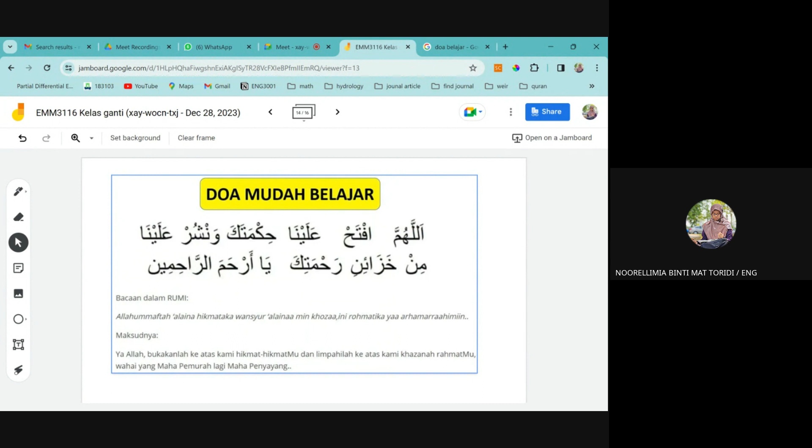So last week, okay, this is the assignment I gave last week. Okay, so we should draw a table.

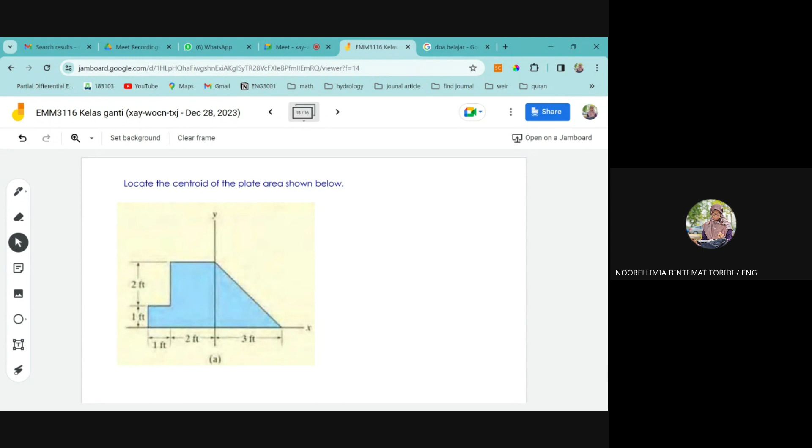Segment, okay, or part, and then centroid, y centroid, x centroid, multiply with area, and then y centroid multiply with area.

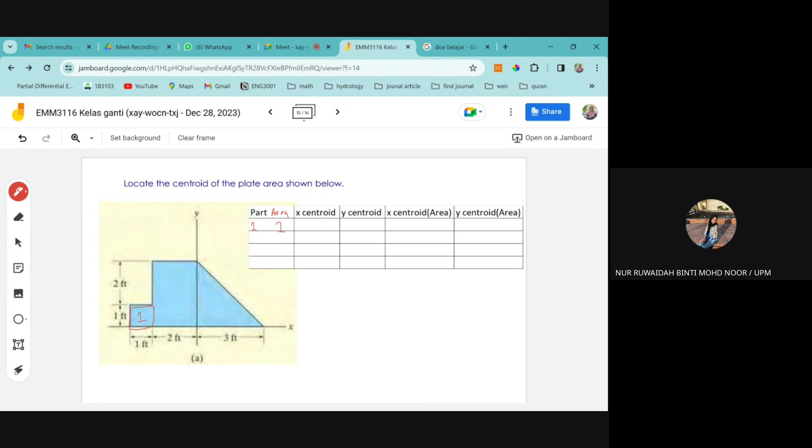1, okay, and then x centroid 0.5. 0.5, and then y centroid 0.5. 0.5, okay, let me explain here. So the base, you took the base here right? Is this the base? Correct. Okay, so the base is here at the centroid. The centroid? Y centroid, sorry. Y centroid.

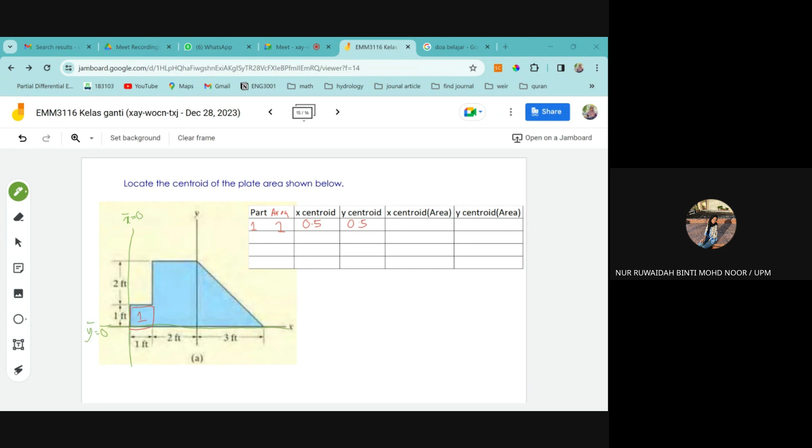Y centroid equals 0. Okay, if it's x centroid, where do you take the base? Here, is it? So this is x centroid equals 0. Okay, x centroid 0.5. Okay, x centroid multiply by area, 0.5. 0.5, wait that's fine, okay, 0.5. Okay, 0.5. Also y centroid multiply by area, 0.5. 0.5 also. Okay, so done for part 1.

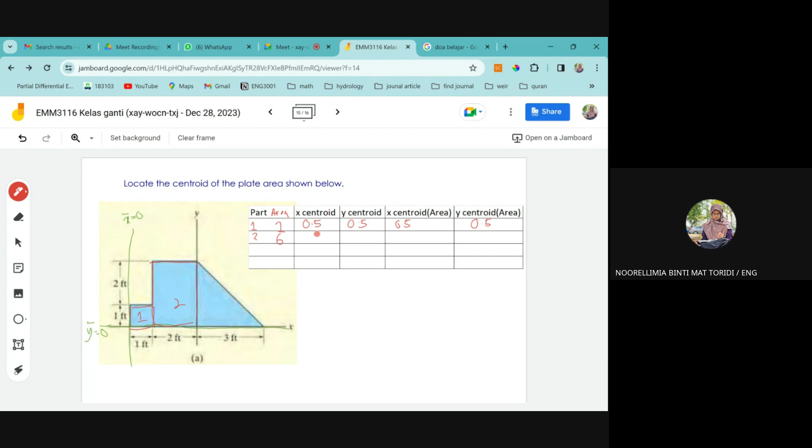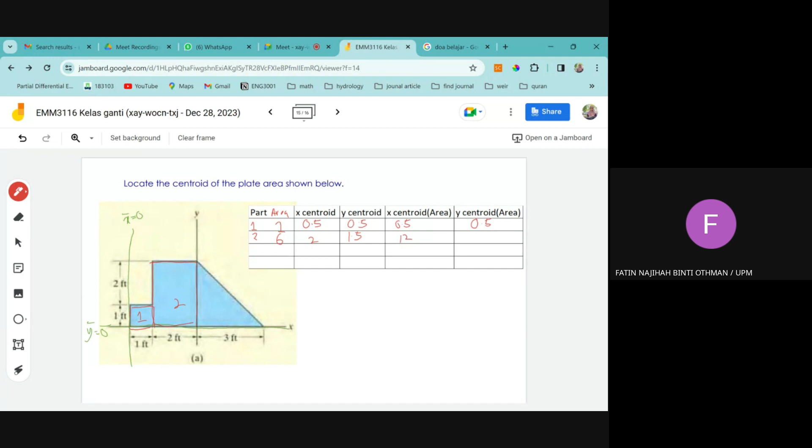Okay, so what's the area? The area is 6. Okay, x centroid? 2. 2, okay, next, y centroid is 1.5. 1.5. And then x centroid times area, 12. Y centroid times area, 9. 9, okay, Fatin Najihah.

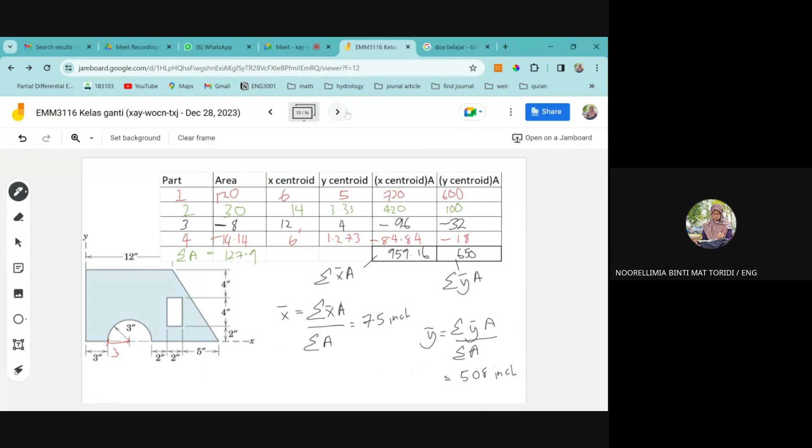Okay, who wants to volunteer for this one? I will doctor, just total it up right doctor? Wait, total and find out using the previous formula which is x centroid. Okay wait, where... okay, so this is the formula which is summation of this one. Okay, summation, okay, what's the summation of area?

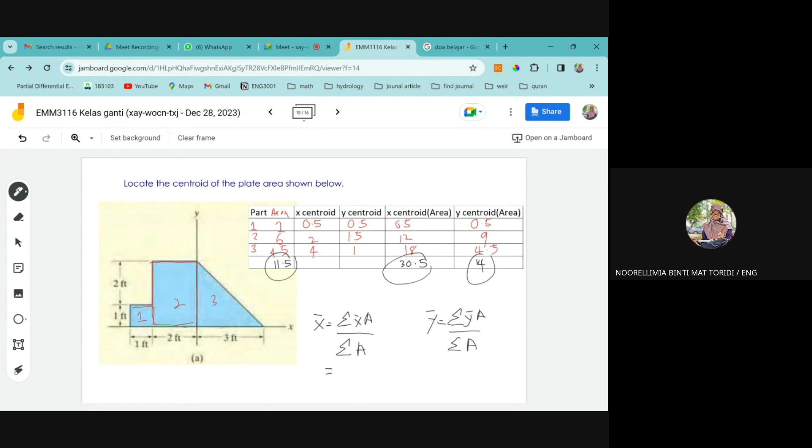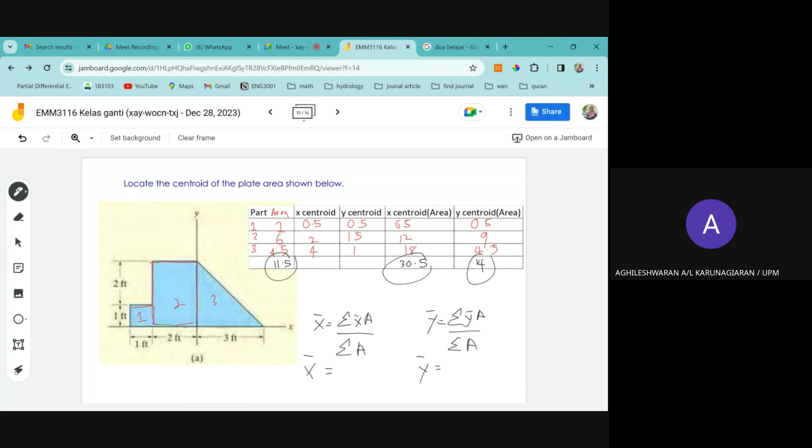Okay kalau based on this one and this one, berapa kita dapat ni Agi? X centroid dia berapa? Tadi Agi kan yang nak volunteer. Ya doktor, X centroid dia 2.65. 2.65. Okay and then Y centroid? Y centroid dia 1.22, 1.22. Okay sekejap, bagi mark dulu dekat Agi.

Yang the rest tak nak volunteer ke? 1,2,3,4,5. 1,2,3,4,5,6. Sebab lepas ni we go for friction tau. So friction ni macam dia more to equilibrium and then we have additional elements which is friction.

Okay so based on this one 2.65 kan, and then this one 1.22. So we have all positive here. Tapi kalau based on this axis, tak boleh kita nak buat. Kalau kita nak buat, then we have to base on, boleh juga, okay based on this axis. Okay contoh macam ni kan, so this is our axis yang kita buat kan.

Okay so it will be X bar, berapa? 2.65. So 2.65 is sini 1, 2. So around here, 2.65, kita ambil sini lah. Let's say macam ni, so this is X bar, 2.65. Okay and then Y bar is 1.22. Okay so let's say dekat sini, 1.22. So this is 1.22, this is 2.65. Okay so maksudnya this is the center of this composite area. Okay which is 2.65 for X and Y is 1.22.

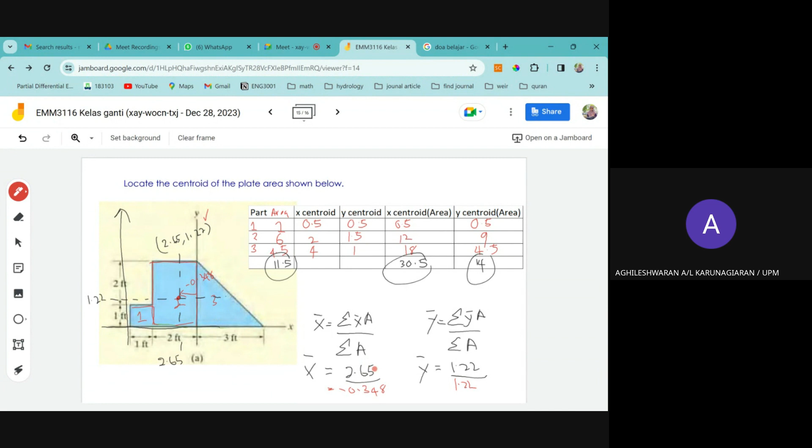Doktor saya tak faham yang 2.65 tu dapat dari mana, yang awak kira ni dapat dari mana? Bukan yang dari jawapan yang kira dari aksis tengah, tak, yang ni yang kita buat ni, kita buat axis sendiri tau. Okay so macam kita buat tadi, before yang awak kira semua tu, this is your, what is it? So this is X centroid equal to 0. Faham ke? Memang dia Y axis, tapi inilah based on kita punya, macam mana saya cakap X axis ni, okay, from here equal to 0, and then moving towards here will be positive. Okay? Faham ke? Faham, doktor. Yang lain faham ke?

Okay, let's say if it's difficult, use the Y and X axis that is already given in the figure. So Y centroid means like this, X centroid we base on this one. This is the base for X centroid equal to 0.

If you say this one, the middle point for part 1 area is this one. So here, negative 0.5, distance here is 2.0. Then from here to here it will be negative, so here negative 2.5.

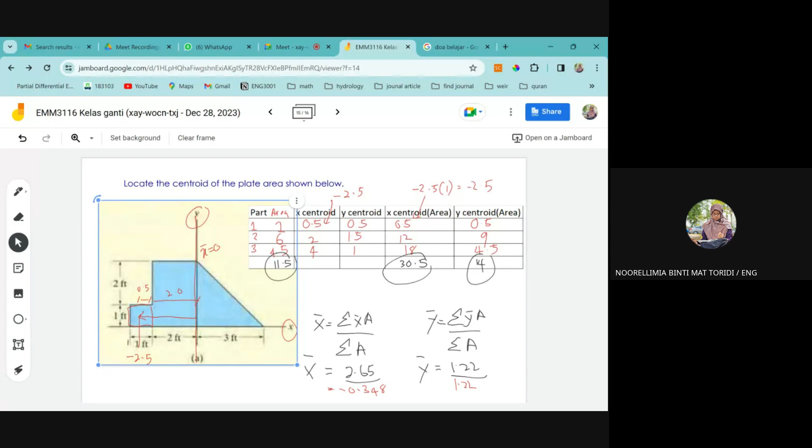Okay let's see. Based on what we calculated just now, the center is here. 1.22, and then the X is negative 0.348, something like that. So here, negative 0.348.

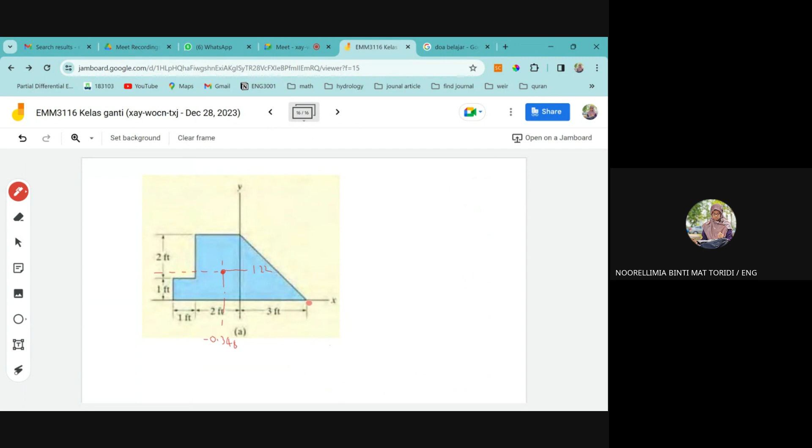This is the center. And then let's say we have tension here, and let's say here we call it, this one A, this one B. Let's say A here we have AY, and then for B let's say we have BX. And then this one will be what? What is the force there? Should be weight, right?

So that is the function why we want to find the composite area, the center. The center of the composite area. So this is the function of it. Understand?

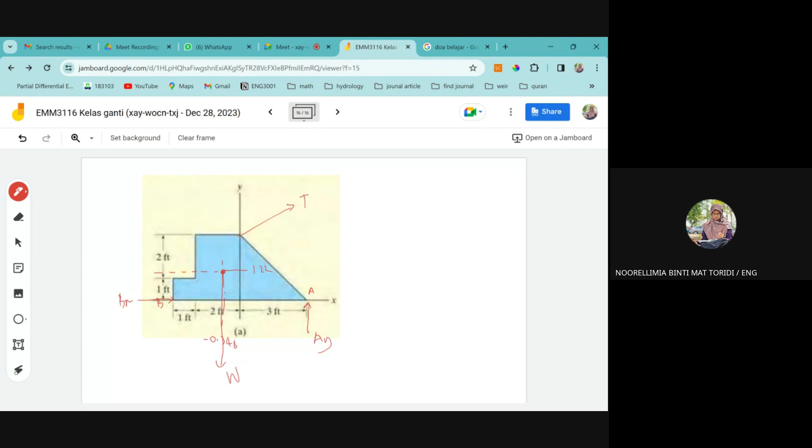Lecture notes, Friction. Where do I want to share this... Okay. Can you see my slides? Can you see? Okay, so we go into a new topic, which is friction.

Okay friction. So for introduction, ideal assumption: forces between contacting surfaces act normal to the surface. So friction is a force between contacting surfaces that act tangential to the surface. For real surfaces, there are tangential forces between contacting surfaces, which is equal to the friction force.

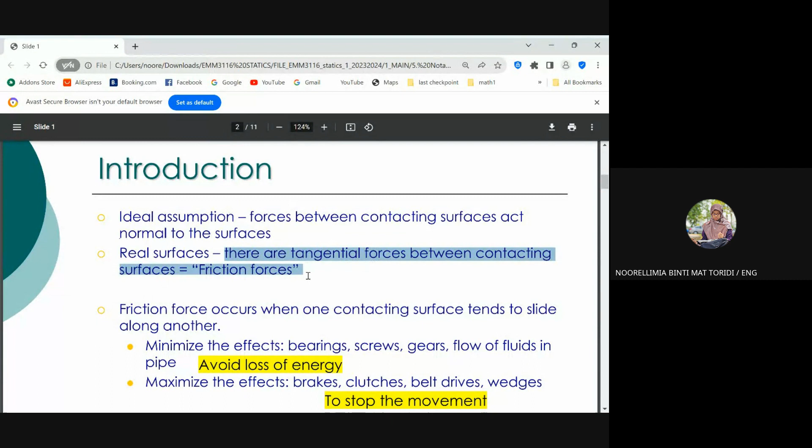Friction force occurs when one contacting surface tends to slide along another. To minimize the effects, we have bearings, screws, gears, flow of fluids in pipes, so these things can avoid loss of energy through friction.

To maximize the effects of friction, we have brakes, clutch, belt drives and wedges. We want to maximize this effect because we want to stop the movement. For example, your shoes, made from rubber something like that, to maximize the effect to stop the movement. If you want to minimize the movement, like skating shoes.

So okay, skating shoes, let me draw it. Let's say for skating shoes, ice skating - have you been ice skating at IOI? No? Oh, pretty good then. Okay let me find my template. Skating shoes and shoes.

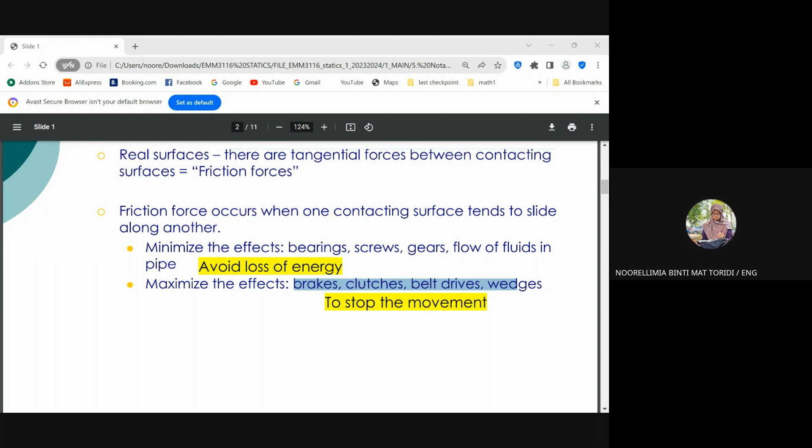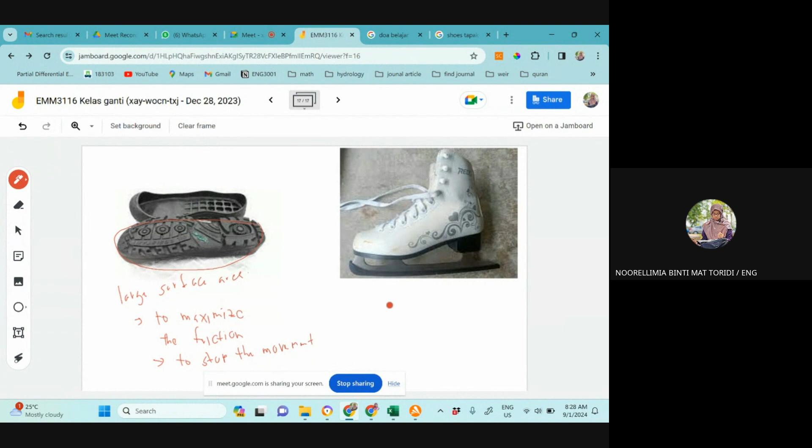We have large surface area, this one to maximize friction. But this one you want it to stop the movement. And then this one, the surface area is very minimum, small area, small surface area.

And this one is to minimize the friction. This one we don't want to stop the movement. Based on the slide earlier, we want to avoid loss of energy - actually we want this, we don't want to stop at all. Don't want to stop the movement.

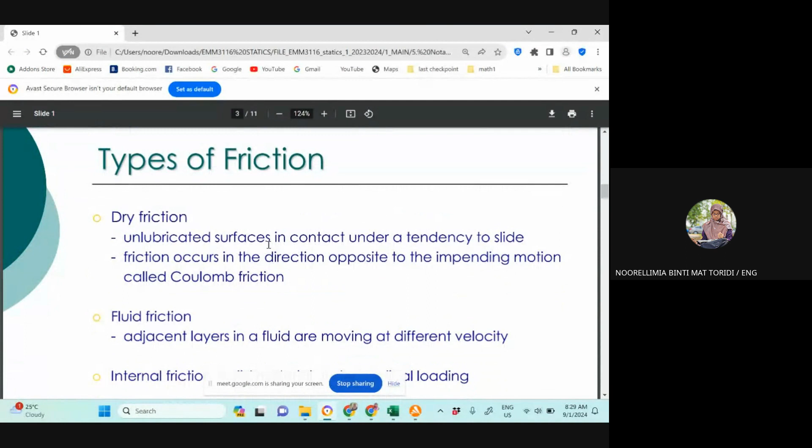How many types of friction do we have? So here we have 1, 2, 3 types of friction. The first one is dry friction: it is unlubricated surfaces in contact under a tendency to slide. Friction occurs in the direction opposite to the impending motion, called Coulomb friction. The second type is fluid friction, where adjacent layers in a fluid are moving at different velocities. The third one is internal friction, which occurs in solid material under cyclical loading.

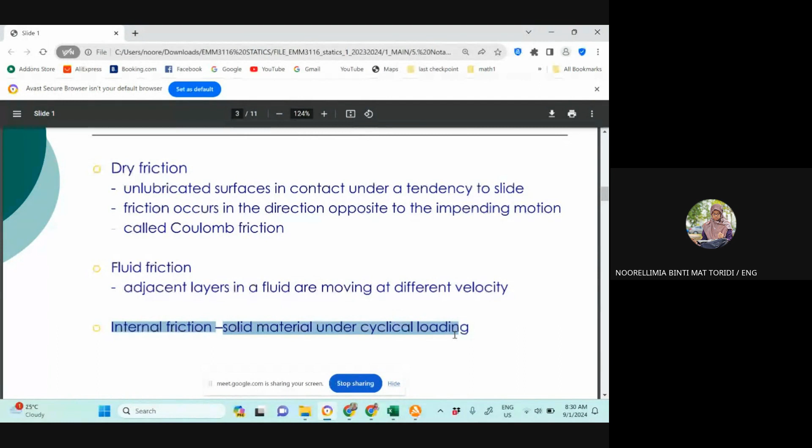Okay, so this is dry friction. First we go for dry friction. This is what we will play along with mostly, which is dry friction.

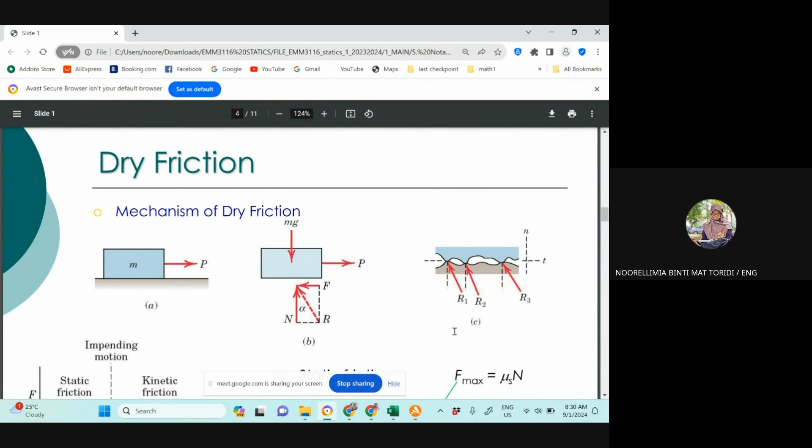So, mechanism of dry friction. First, in this diagram A, we have a mass object, and then we have a pulling force P, for pulling this object to the right. So what happens is, the surface will be smooth or rough - if smooth, there will be no friction. If the surface is rough, then we encounter friction.

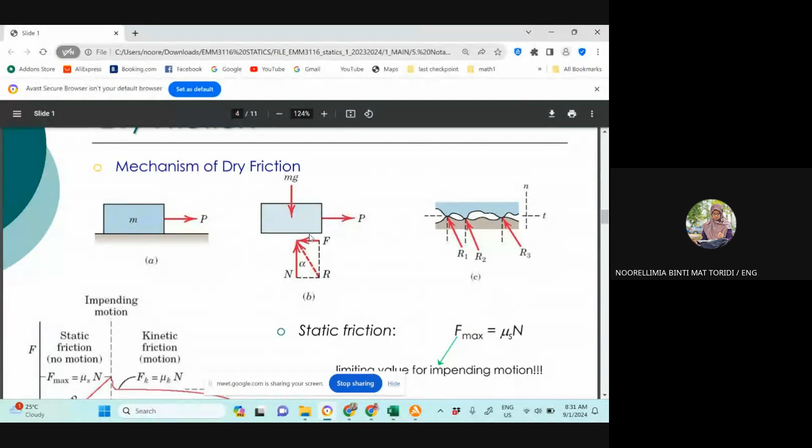So what happens here is we have the pulling force to the right, and friction will be opposite to the movement, because the function of friction is to stop the movement. So it will move to the opposite direction of movement - movement to the right, friction to the left. Then we have N, the normal force to the surface area. If we combine F and N, we come out with R, the resultant force. This is the simple one.

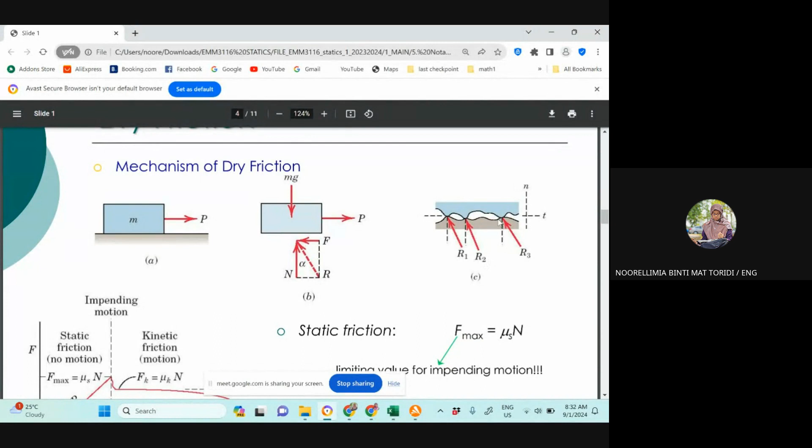In diagram C, let's say we have a lot of friction points. The contact surface has 3 points where the object meets the surface. So at point 1, we have F1 and N1, combined we get resultant 1. At point 2, we have resultant 2. At point 3, we have resultant 3.

So this is the graph, where F stands for friction and P stands for the pulling force too. So here, if pulling force is greater, friction also will be greater for this part. This first phase we call static friction - no motion. Then up to this point, we call it impending motion. Here Fmax is the impending motion - the object doesn't move yet, but once it's about to move, it reaches friction maximum.

To find friction maximum for static friction, Fmax equals mu S, where mu S is the coefficient of static friction, multiplied by the normal force.

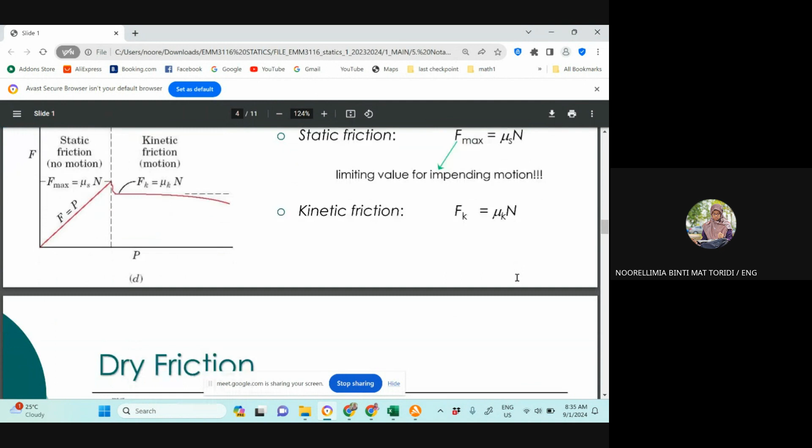So here, I won't focus on the cone. The direction of R, the resultant force, is specified by tan alpha equals F divided by N. Tangent - what's the formula? Opposite divided by adjacent - TOA. Tangent is equal to opposite divided by adjacent. So opposite of alpha is F, correct?

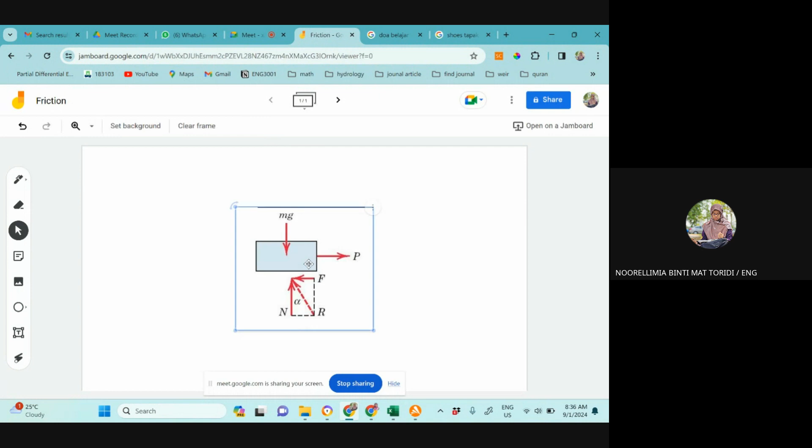Okay, here we have it. What did we want to find? Tan alpha, which is equal to opposite over adjacent.

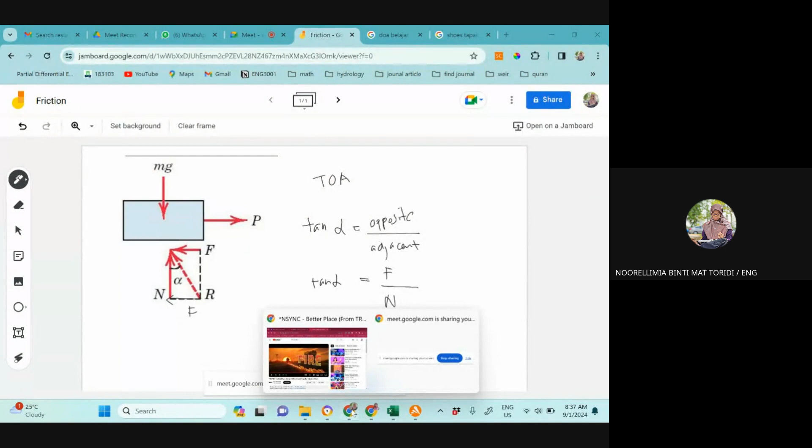So that's why we get... tan alpha is equal to friction divided by N, normal force. When the friction force reaches maximum friction, the angle alpha reaches a maximum value.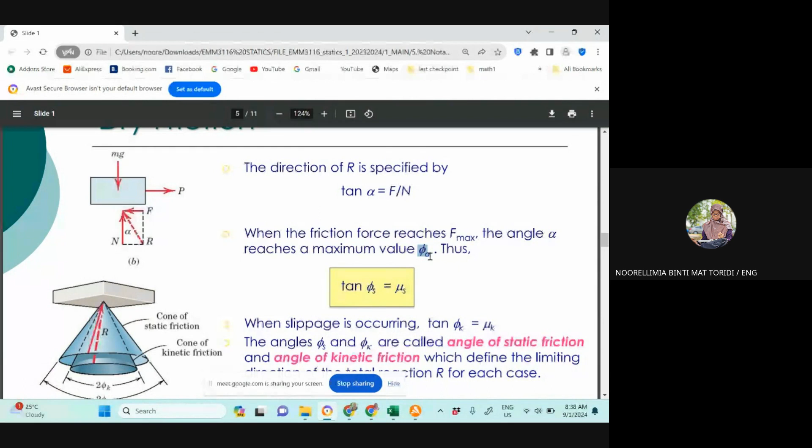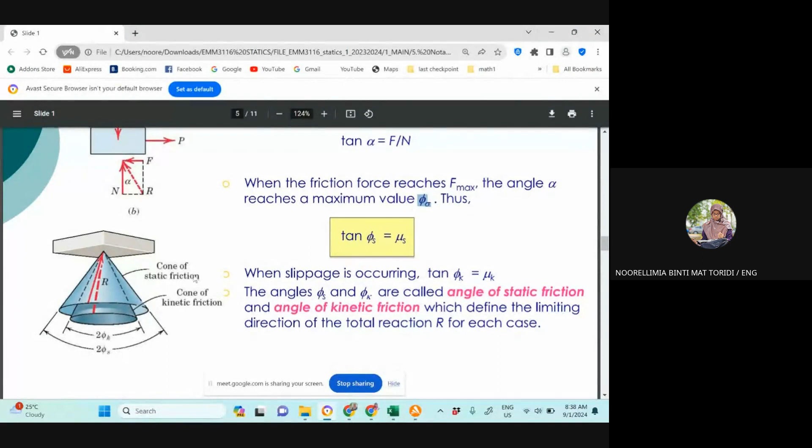This one is called the cone of friction, which I did not focus on yet. Okay, so this one.

Motion is impending means the body is about to slip, meaning the object is about to start to move. So this is the formula based on the graph: friction maximum is equal to coefficient of static friction multiplied by normal force.

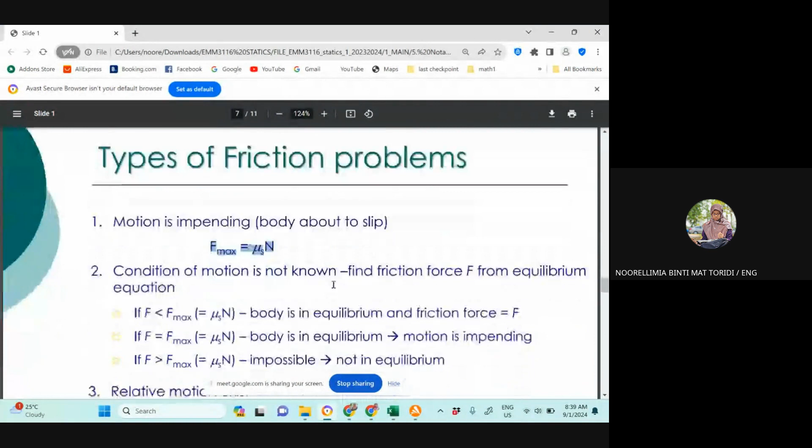Second, friction problems. The condition of motion is not known, so we find friction force F from the equilibrium equation. The equilibrium equations are: summation of Fx equal to 0, summation of Fy equal to 0, and summation of moment at a certain point equal to 0. From that we can find the type of friction problem.

For the first type, if F is less than F maximum, the body is in equilibrium and friction force is equal to F. Second type of problem: if friction equals friction maximum, that's impending motion - the body is in equilibrium and motion is impending. Third type: if F is more than F maximum, it is impossible, not in equilibrium.

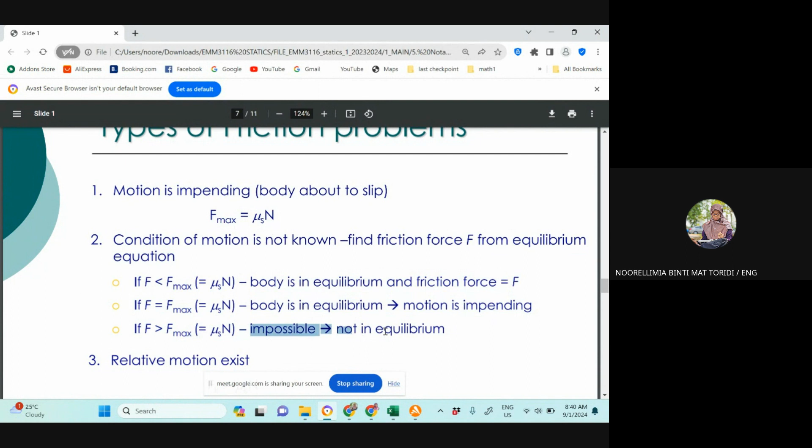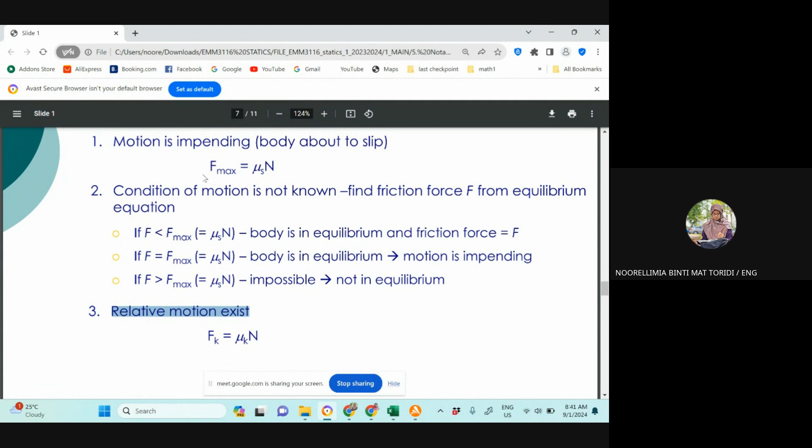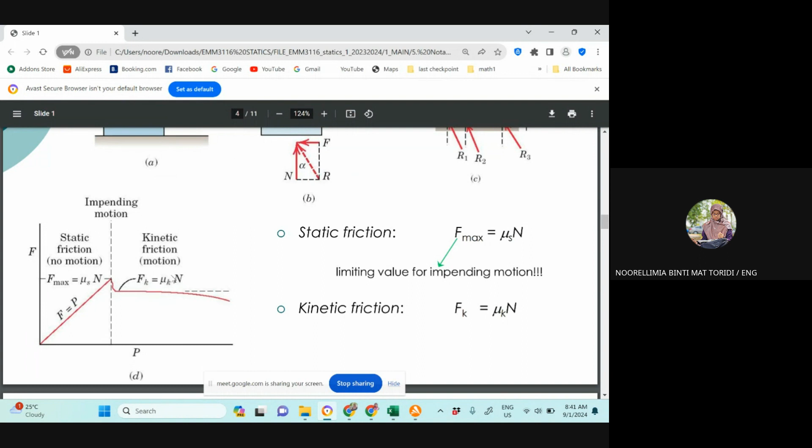Third problem: relative motion, when the object starts to move. If you see the graph, first F will be equal to the pulling force, but at a certain point when it reaches maximum, the maximum friction equals coefficient of static friction multiplied by normal force. If it passes this limit, it will start to move - the object starts to move. So this is the formula to find the friction when the body moves.

Okay, so this formula is the same as before: coefficient of kinetic friction multiplied by normal force. This happens when the body starts to move.

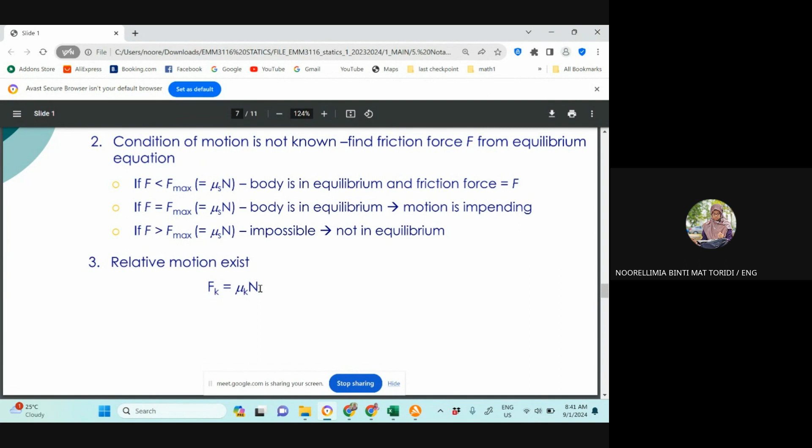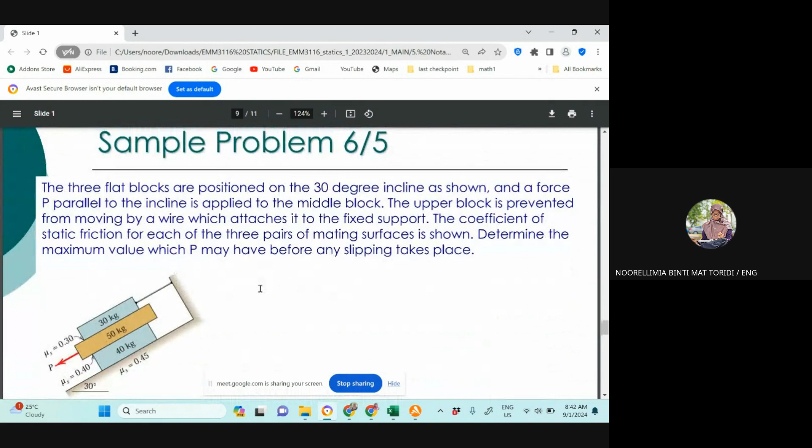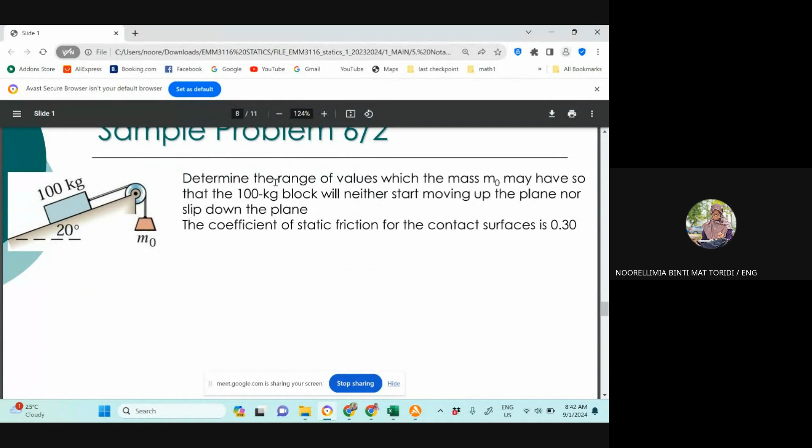Okay, sample problem. Let's read the question first: Determine the range of values which the mass m0 here may have so that the 100 kilogram block will neither start moving up the plane nor slip down the plane - meaning it will not move upward or downward, it will be static. The coefficient of static friction for the contact surface is 0.30.

So now we need to determine the mass of m0 here. What is the kilogram value of this object m0? So do you know what you have to do first? What's the first step?

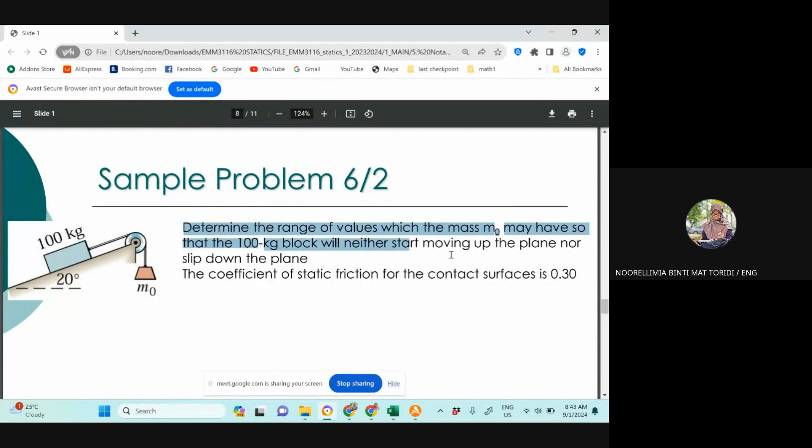Okay, so what I want you to do is draw the free body diagram. So the first task for tomorrow is to draw the free body diagram, and by the end of the class we should solve this problem and submit it to me.

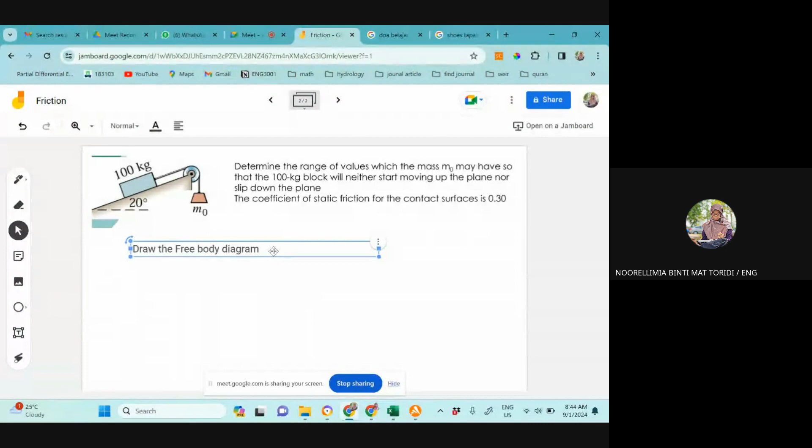Draw the free body diagram of this object. Okay, that's all for today.

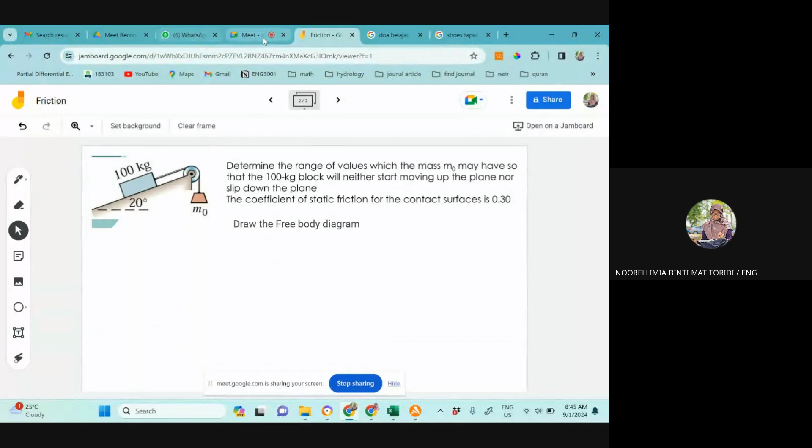Thank you, Salam, thank you Doctor. Thank you, Doctor. Thank you, Doctor.